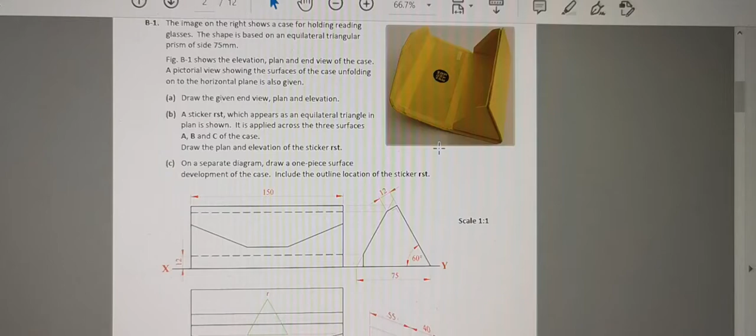Okay, lads, this is the next question we're going to look at here. It's B1 from 2020. Now, the key thing here is that it's based on an equilateral triangle of side 75 there in the side view. So that is an equilateral triangle.

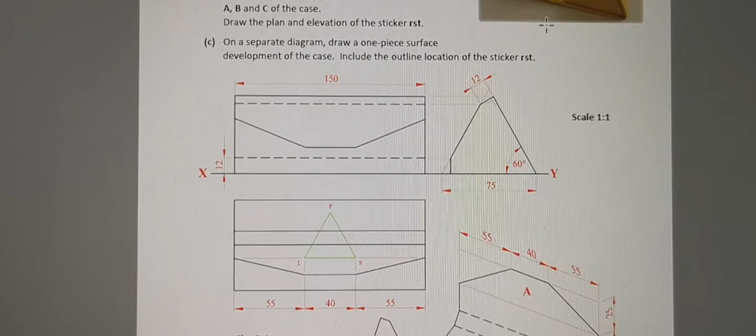Now, I'm going to allow you to read the question yourselves, but just note there, the solution, the development is practically given to you there. And just to note that there's 1, 2, 3, 4, 5, 6, 7, 8 parts to it. So you've got the 6 parts there and the 2 sides folded down. So, the last thing I'll say there is just to be aware you're going to need room for the development. So I'm going to try and start the elevation, plan and end view high up on the sheet, out of the way.

Okay, so step 1 anyway is to draw the elevation, plan and end view. Now we know that it's going to be around 70 high. So just come down there, and I want to keep it tight to the left. So it's 150 wide. So there's our elevation. It didn't say how much to leave between them, so I'll just leave 10 between them.

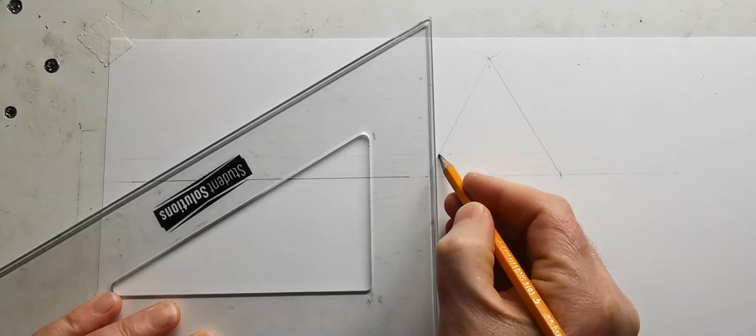So here is 75. So set our compass to that. So we know anyway it's a 60-degree angle, so I'll draw this in light for the time being. Now this cut here is up 12. So that is there.

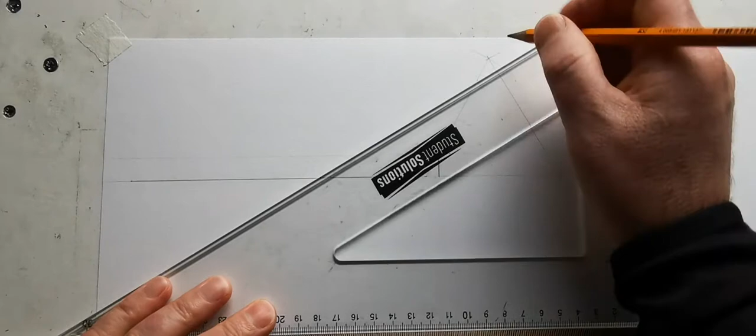And there's also a cut. I'm going to put on a perpendicular here, light. I'm going to come in 12. I'm going to take that back up parallel. So there, and that's back out perpendicular again. So that's my end view.

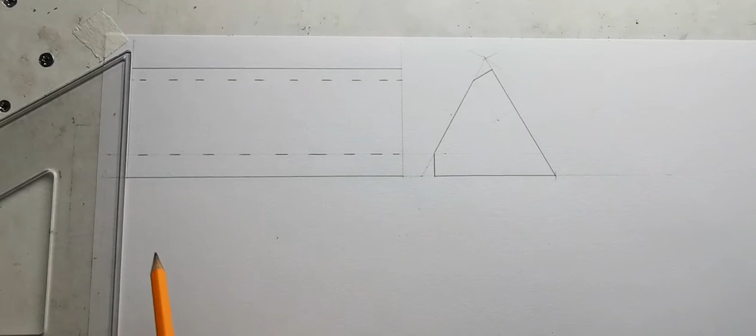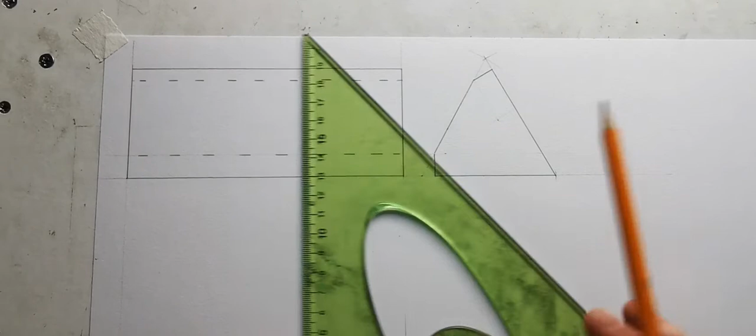So we now know the height. So there's the top height. So that's dotted. And this is dotted. So I'll just put on my 45-degree line here. So I'll just heavy in the outline of this.

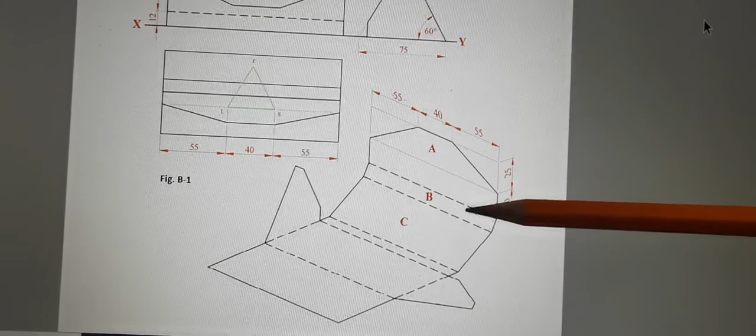Okay, so that there is a lot of the front view, side view, top view set out. Now just to look at the question here for a second, what's important here now is the 20 and the 25 here. I'm going to be using them in a second, and they're on A. Now A is, I'll call it the overlap that's here on that. So I'm going to be using those measurements next, that 20 and 25.

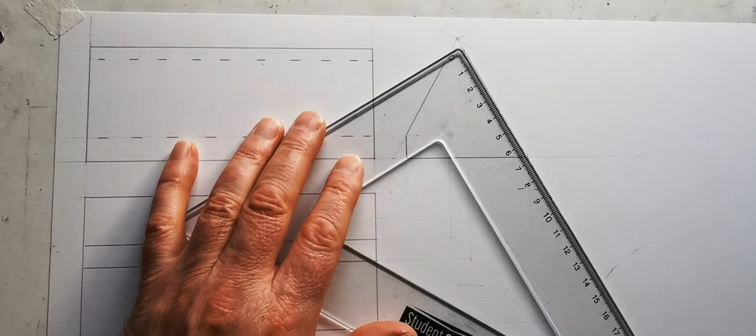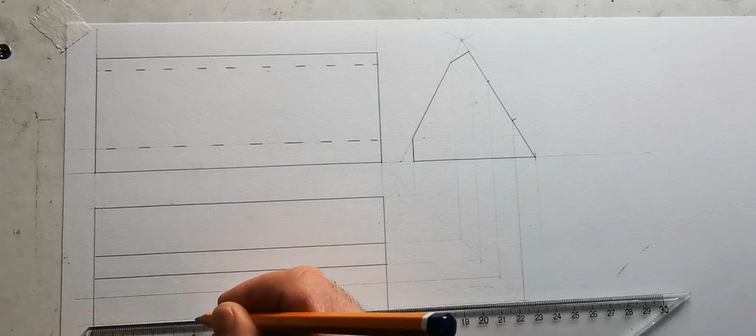Okay, now they're attached there onto B. So that 20 and then the 25. Okay, now I know I've marked them in very heavy there, but I want you to see where they're coming from. So I'm going to project them down and across. And I'm just going to mark, now those distances are 55 in from either side, leaving 40 in the middle, which is correct.

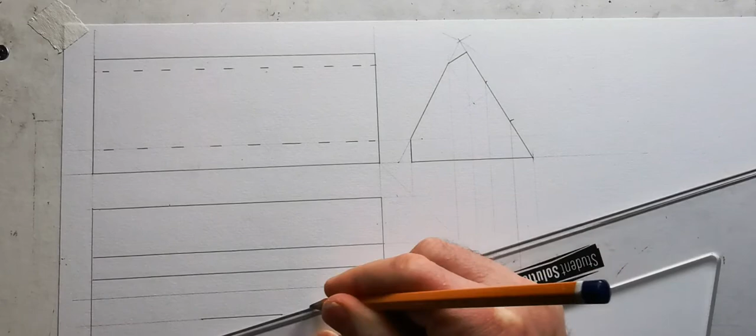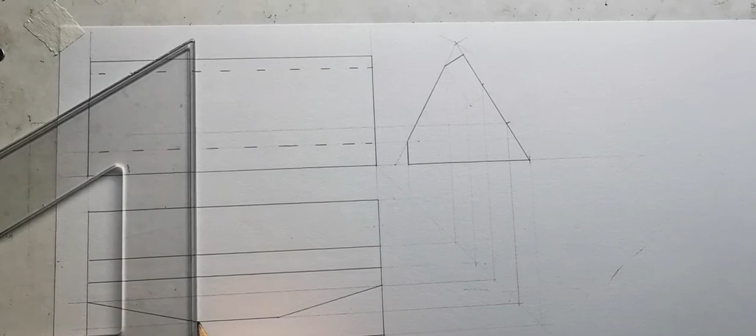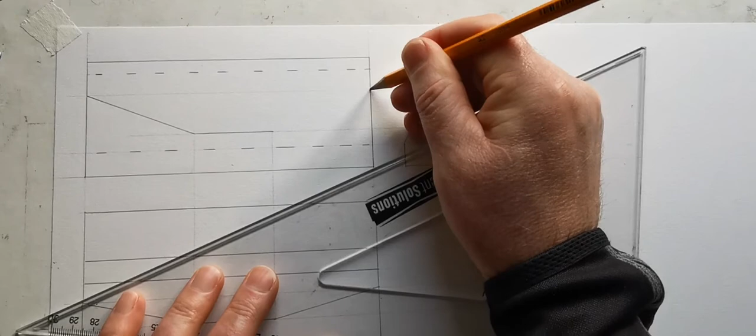So that overlapping seam here, these 2 points are on this height, and they join to here on the outside, so I just projected them across. So that is the elevation finished, that is the plan finished, I think, and end view finished.

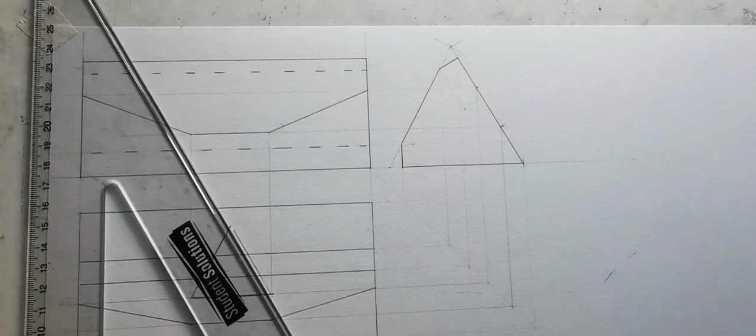Now the next thing I'm going to deal with is this green sticker, so I'm going to actually put it in green, just sharpen the old pencil there. So that's an equilateral triangle of 40 in plan, so I'll just draw that there, and okay, so that green sticker goes on there now. Drawing with colouring pencils now may not be the greatest move, but I do think it'll help us to understand it. So it'll slow us down a small bit, but we'll get over it.

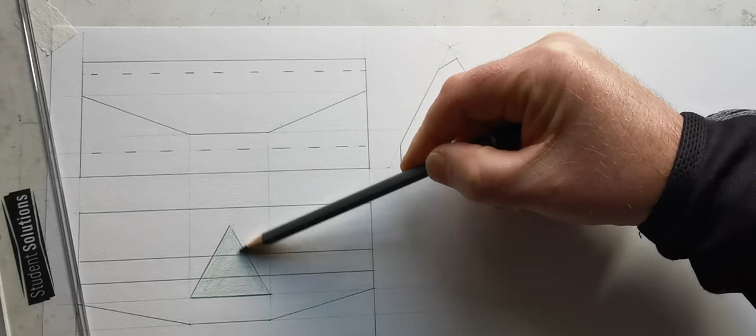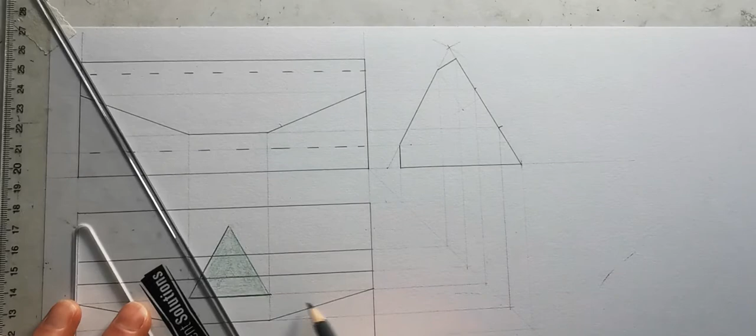So now, maybe it's not obvious, but that green sticker is going on 3 surfaces, so it's on the front, it's on the slope at the back, and it's going down on this surface then. So when I project that over, it starts here, so it goes up to the top, comes over the next surface, and projects back, so it goes down as far as here.

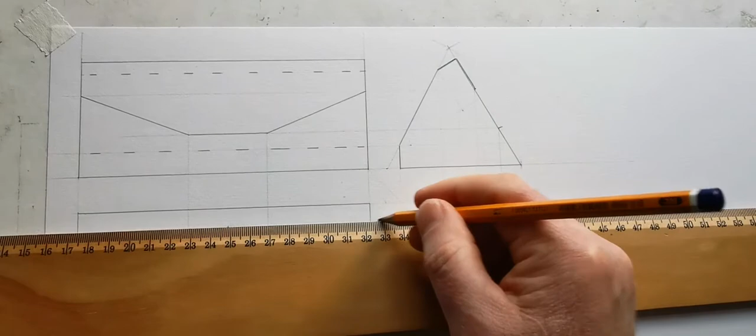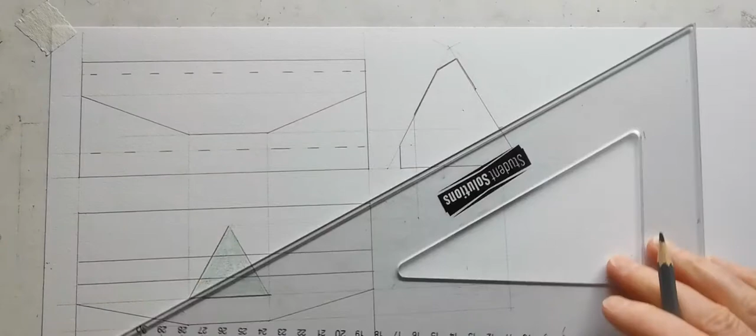On the back sloping surface then. So I'm going to just put that in there in green. So hopefully that's coming out okay. So that there, now it might not look green, but it is. So I'm going to project that across now to the elevation.

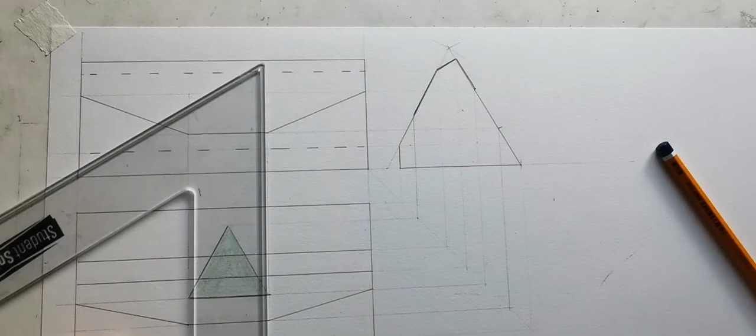So my first 2 points are, now again I could bring up more points in one go, but I won't. I'll just take my time here and build this up a bit slower. So that is the base of it. Now it crosses over the top here and there.

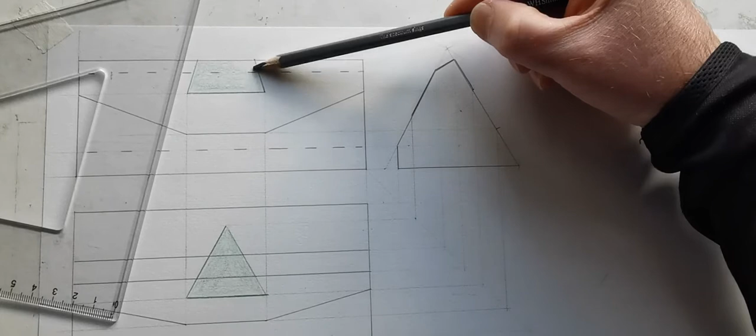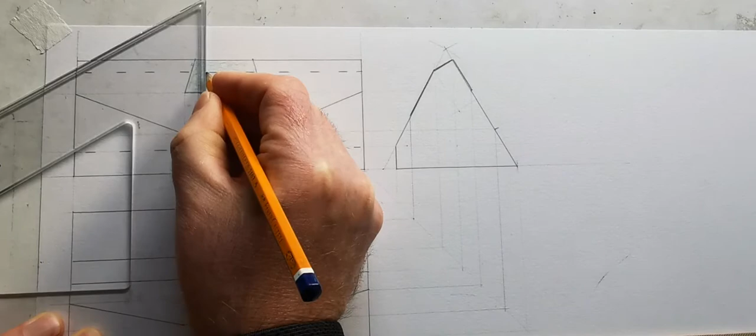So I'll just lightly colour that in green. Now we're going to have a slight issue here in that I'm going to be putting dotted lines down the back in a second. So I'll just try and keep the colouring light here. So now it crosses over this edge here and there. So that's going to give me dotted lines like this.

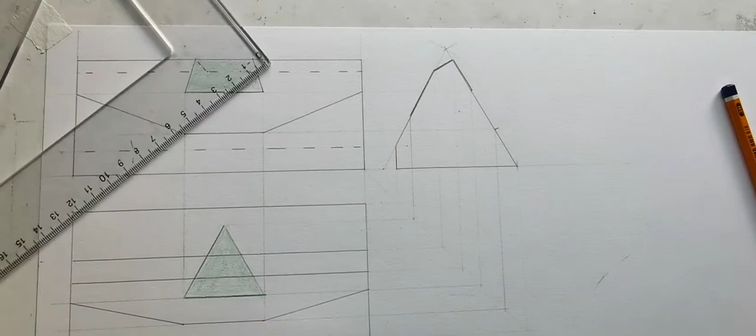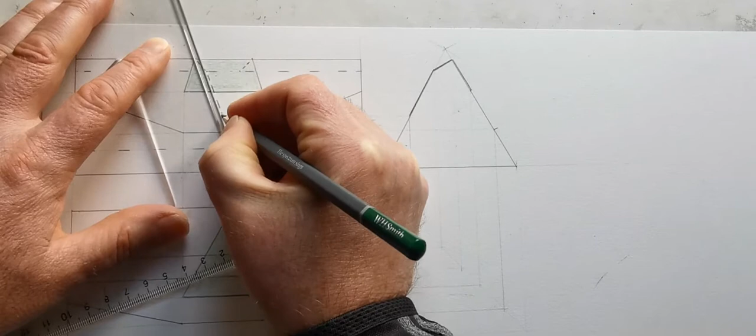And finally then, the point of the triangle is here in the center. Okay, so that's our trickier part of it done there.

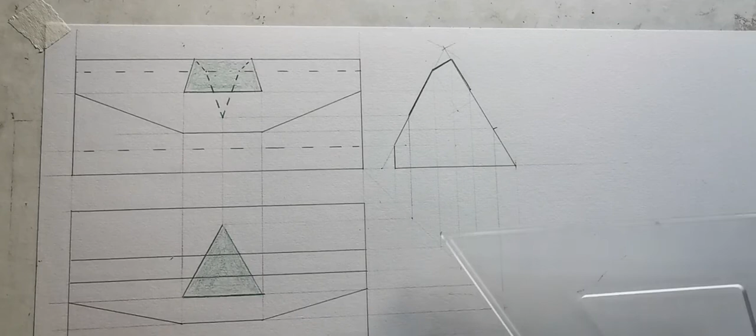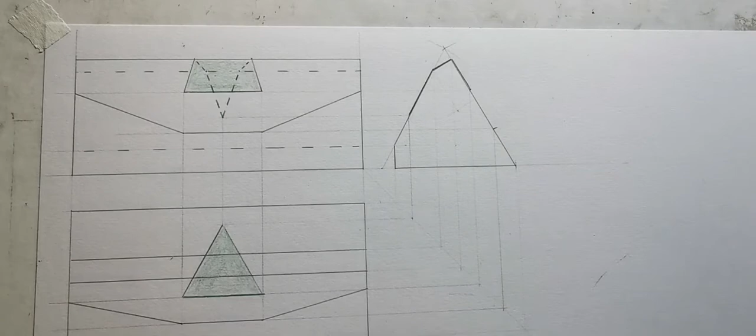Now the last thing we want here is a surface development of this. Now look, this was given in the question really. The answer was given to you in the question. So what I'm going to do here is, I think that base, that's 150 and the base sticks out 70 either side. So 150 and 70 and 70 is going to be nearly 300. Okay, so the only way I can fit this really is I'm going to draw the base or the 150 here just a small bit. So look, in the exam, if you were doing this on big sheets, you probably would fit this in a little easier.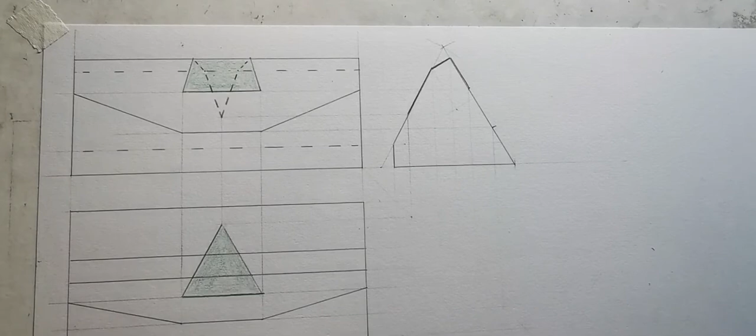But I'll just lighten off here now. So I'm just lightening that off there a small bit, so I need about 7. Okay, so I need about 150 and roughly 70. So there's my 150. So hopefully I'll be able to fit that in there. So now I'll draw this. Apologies there, now I'll just zoom back out again. So I'm hoping to fit in the 150 for this here. So I'm going to draw the base over here.

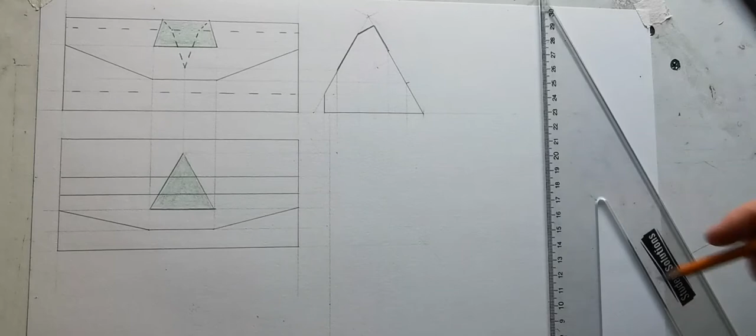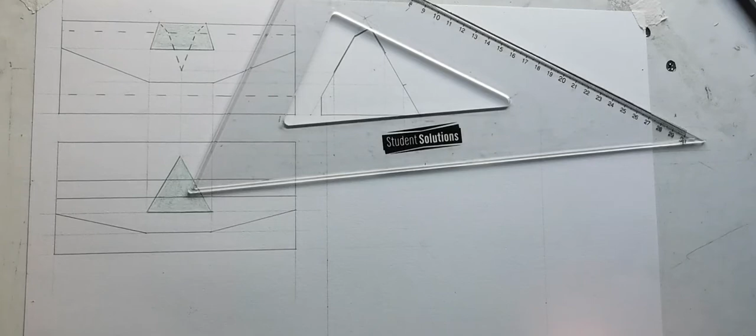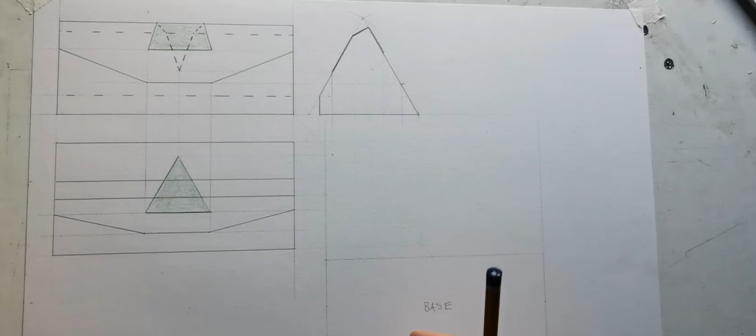And so the base of this, looking down from above, the base of that is 67. Okay, so I'll just start it randomly here somewhere. And I'm going to just draw this in light, but a little bit heavier than normal really. Okay, so that's the base that's sitting on the ground. Now I'm going to fold down next the two sides.

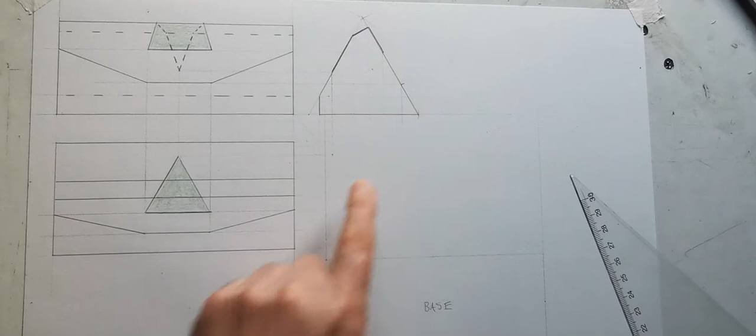Okay, so we know here that the full 60-degree angle is here. One side is a 60-degree angle, and we'll say if I transfer that base over here like this, that 60-degree angle is at the front. So that's going up like that, and the other side is the opposite. And at the other side here, then it goes up 12.

And what I can do next there then is along the 60-degree, that's how far out this goes. So that's there and here. So just heavy those in.

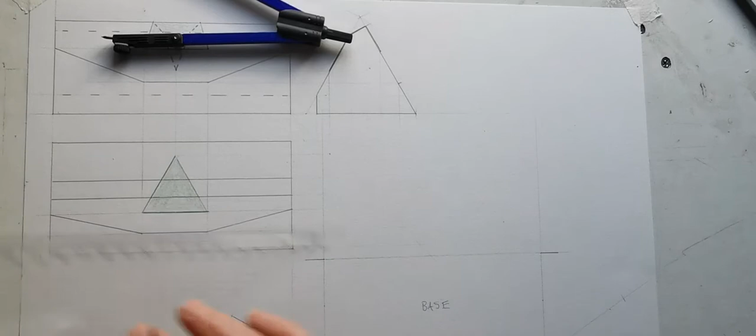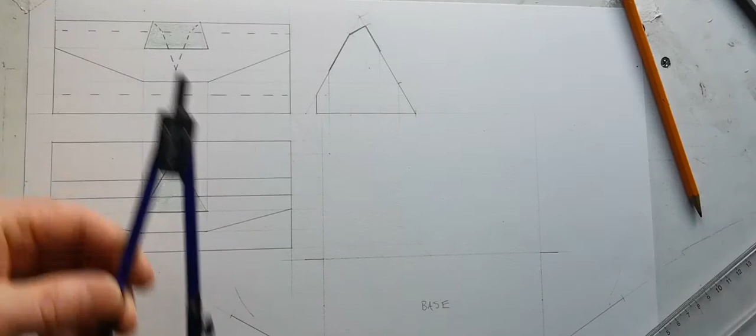And this last point there, then I'm just going to take an arc up to that from here, and arc from there. So I'm after taking that arc from there, and we know it's perpendicular from here. So there's two ways. I could use the angle or I could use the distance. So either one of them. So if I was using the distance, it would be like this. And if I was using the perpendicular, it would be like that.

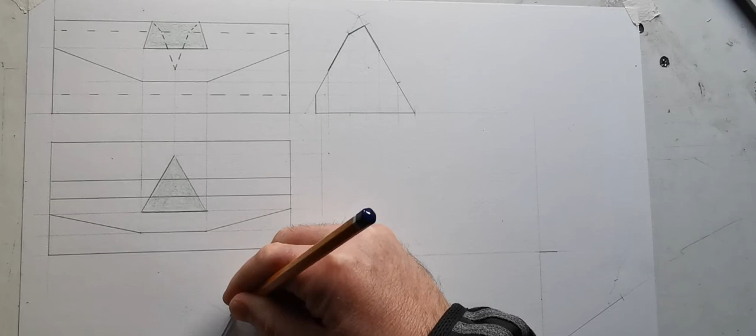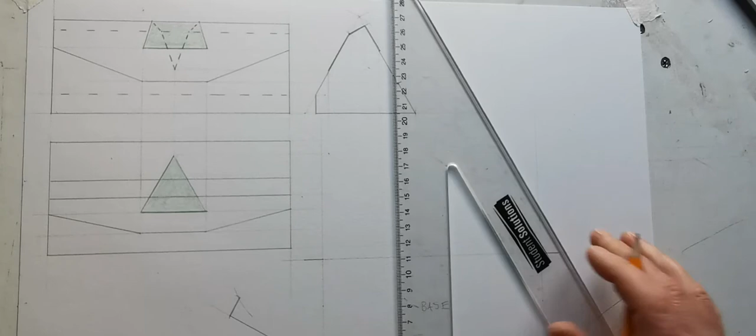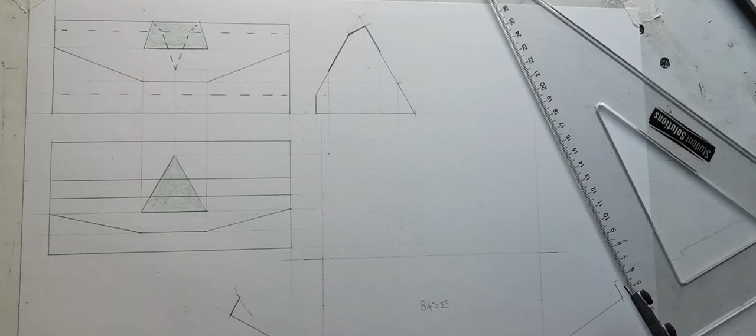So, ooh. Okay, I don't know why that's just a small bit inaccurate there now, because that is a true length of that, of here, and I'm just going to double check that again. So what I'm going to do is I'm just going to swing an arc from this corner, just as another check. Yeah. Yeah. So that is the side.

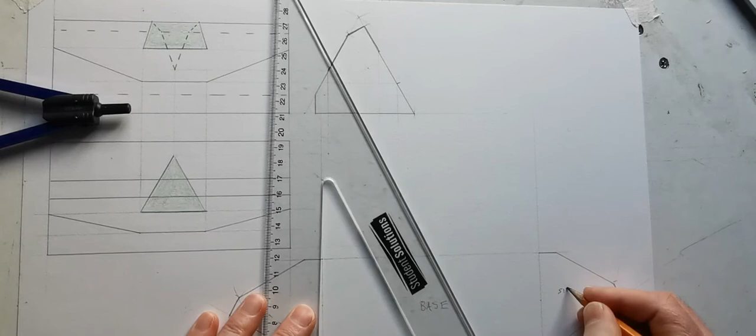Okay, so there's the base, and there's the base. So I'm going to start building this up there now. So we know it goes vertical here for 12 next. So that's the next piece. And that's the vertical bit there.

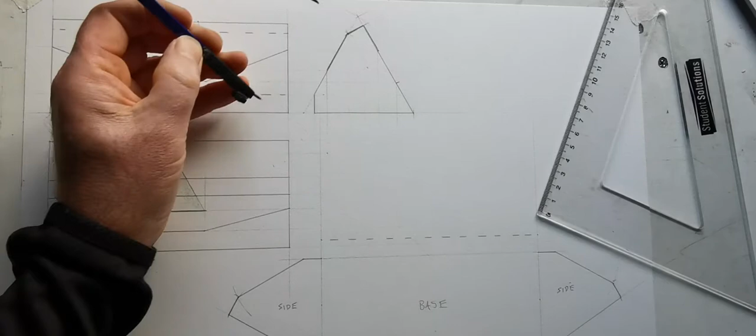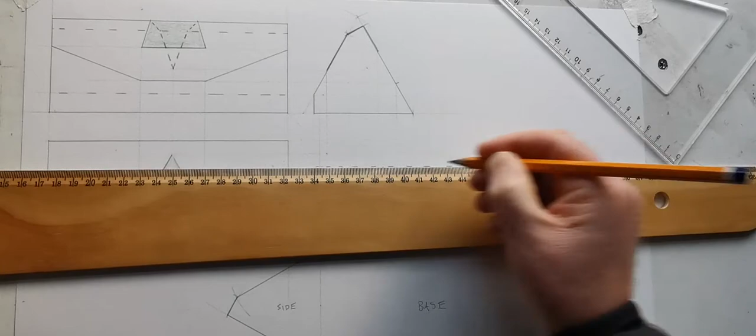And then we have, just stick a compass on that. So then we have this straight bit going up there. And then we have this little rectangular piece here, so I just need a distance for that, which is 12, that's right. That was 12.

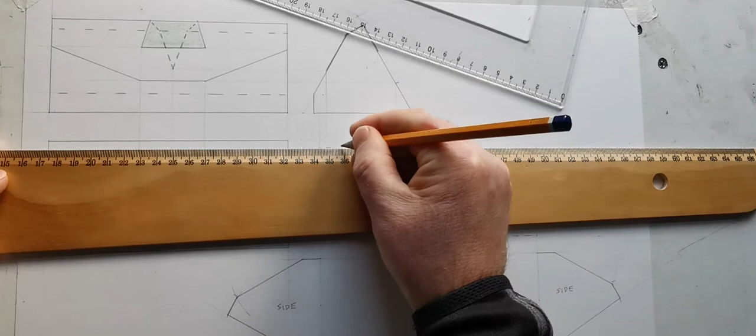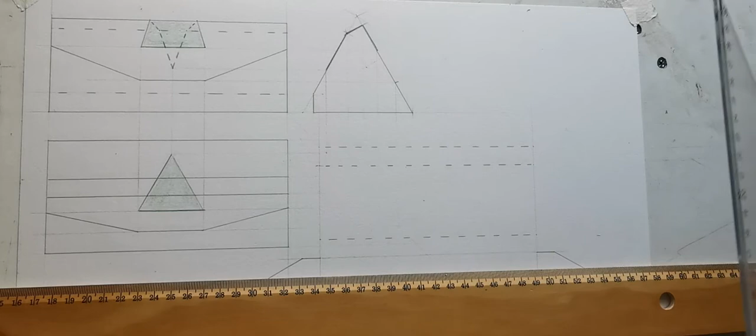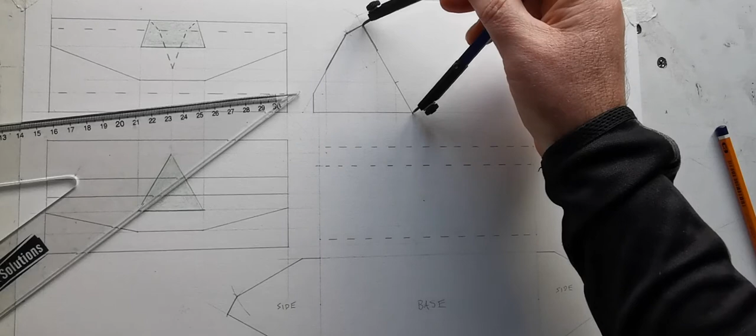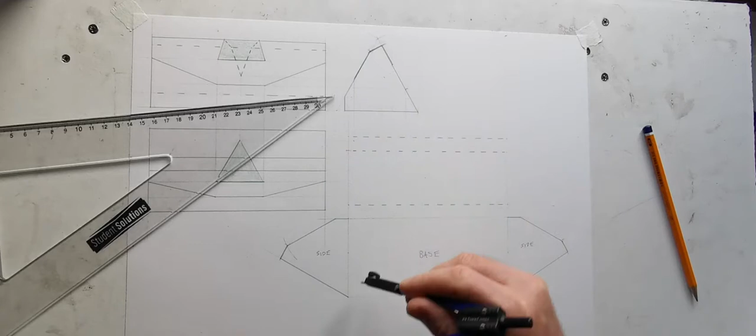So that was surface B, and finally then I'm going to have this slope here goes on. Am I going to fit that now is the problem. No. Oh God. No. My problem is that that goes up there and that's going off the sheet just a small bit.

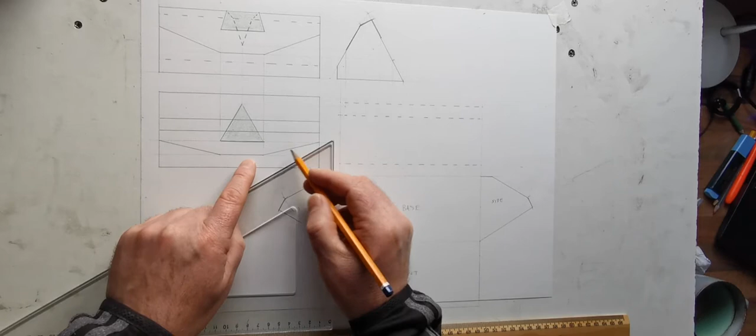Okay, so that's going off the sheet there a bit. So if it was in an exam, you could just stick in another bit of the sheet there and put it on. So that would be going along here. Now that would be the slope at the front. And what comes next here now is our overlap seam here. Now our overlap seam here goes down. We know the true lengths of that from setting it up in the start was 20 and 25.

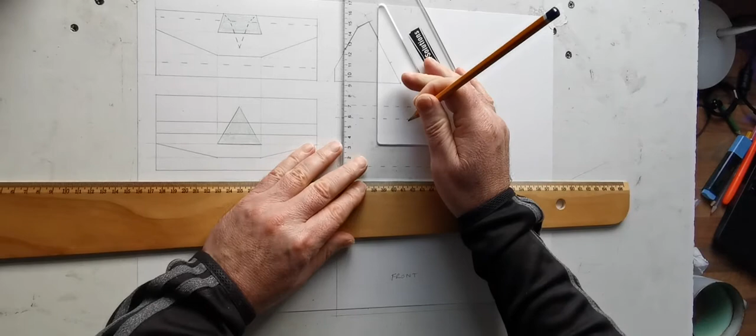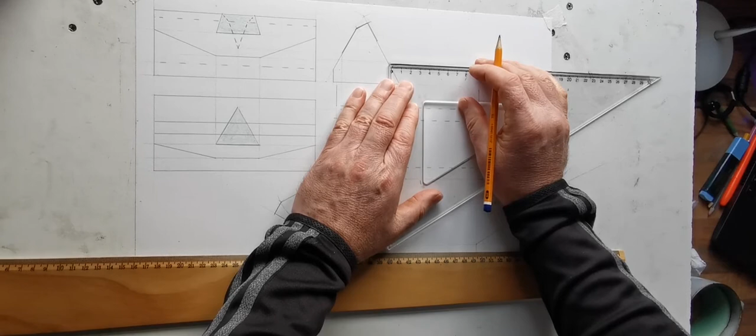So that goes, now I'm going to end up drawing some of this development on top of the end view, but there's nothing I can do about it. So 7 to 9, so that's 20. And then 25. So that's the end of it along here. And we know that that goes in 55 and then 40. So we'll just have to put that the best we can.

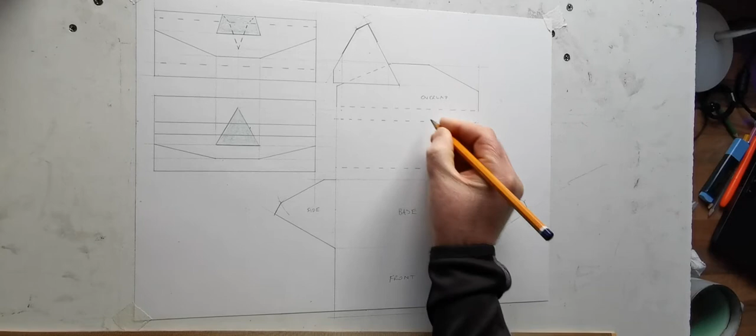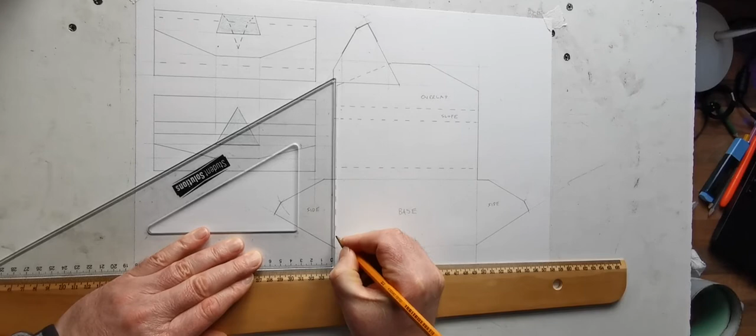So here is our seam, or that overlap thing. I'll just dot it. So that's the overlap. That's the slope on top. Okay, so there are all the bits. Now I'm going to just heavy these in. Now that's folding there. And that bit's just gone off there, nuisance. But anyway,

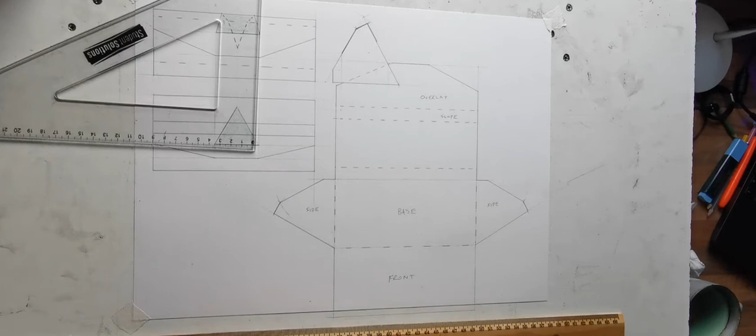so the last thing we need to do there now is we need to get our green triangle onto this. Now we know that it starts here, which is 40 wide on this seam line here. So that is the start of it.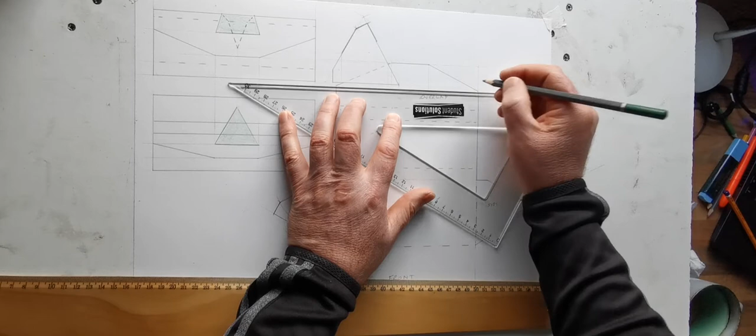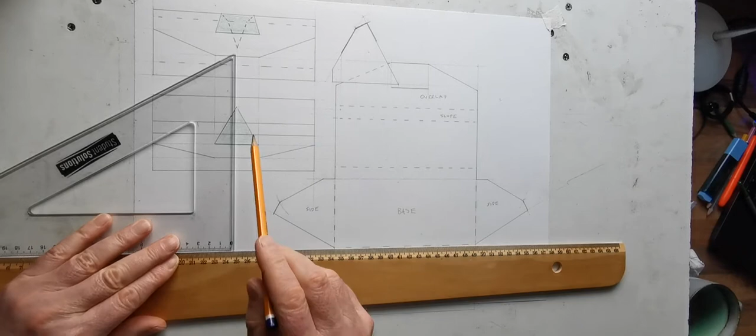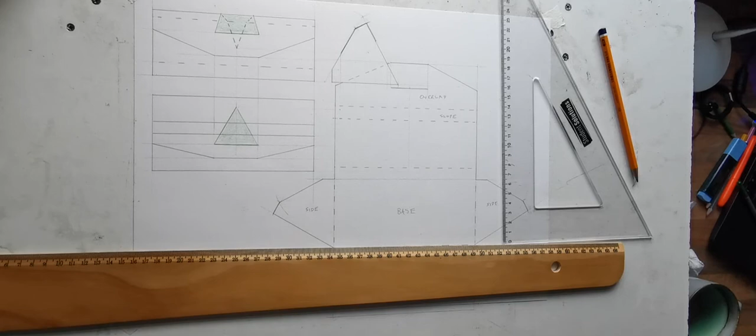Okay, now the next it crosses over there then the slope. Now what I'm going to do there is I think I'll just take a center line light down through this and I'll put a center line on that because it's slightly quicker. Because these are all true lengths, I'm actually only worried about the width. So it crosses the next edge because this is symmetrical either side of the center line. That's that far to either side. So that's here.

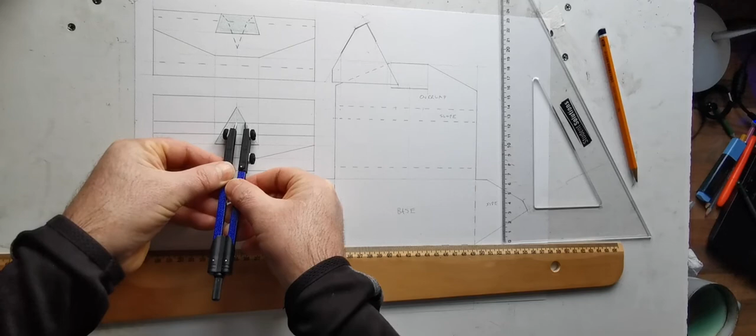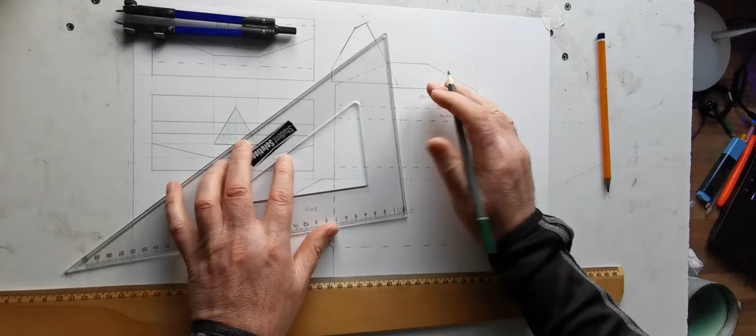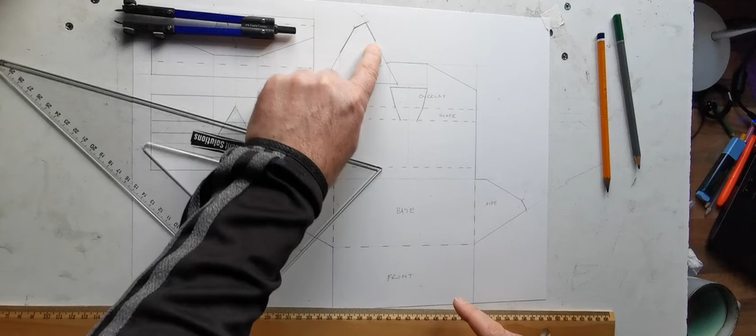And the next one is here. So I'll just draw that much first. And finally the top of it then is, you could say, that far down from there. Okay, so that there, just put a bit of colour on this.

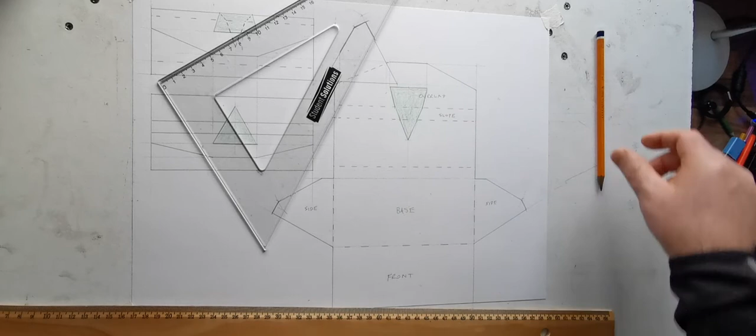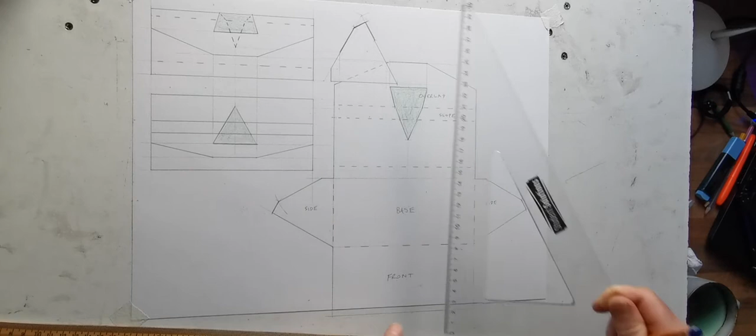Okay, so if you're doing that, your options are, I suppose, really that's possibly the best way. Just keep it up there a small bit. So if I had started this in line with the plan, but basically look, it's about 250 the total length. Now I could have calculated that, and I suppose I should have really, because if I had added that, it would have told me exactly how much I needed to roll it all out or whatever. But the seam there extra on that. So

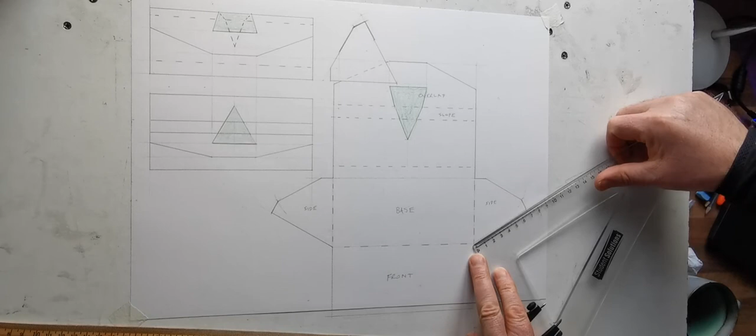Just double checking there. On a separate diagram, draw one piece surface development and include the outline of the logo. So you don't need to colour that in, but just the outline of it. Or guys, another way you could get this to fit pretty well is if you measure this, which is 69. So if you were to start with that front piece there, which is 69, because you can get that measurement off here.

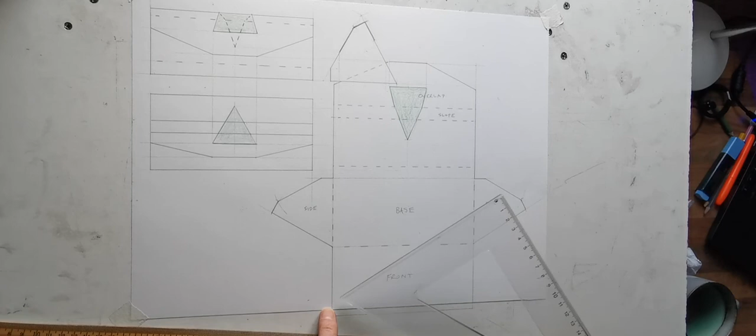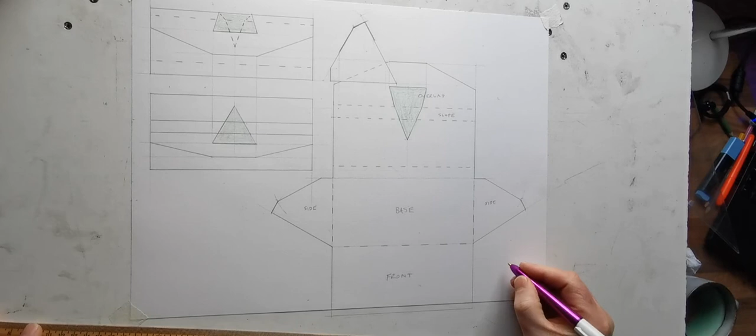So like that's 69. So if you put your, just start there a mil or two up, put your 150 and 69, that'll be the front bit, and then the base is going to be like 67 or something comes next. But yeah, you'll fit it alright, but it's tight enough on the A3 sheet. So yeah, that's the, just label that. So that's 2020 higher level B1.